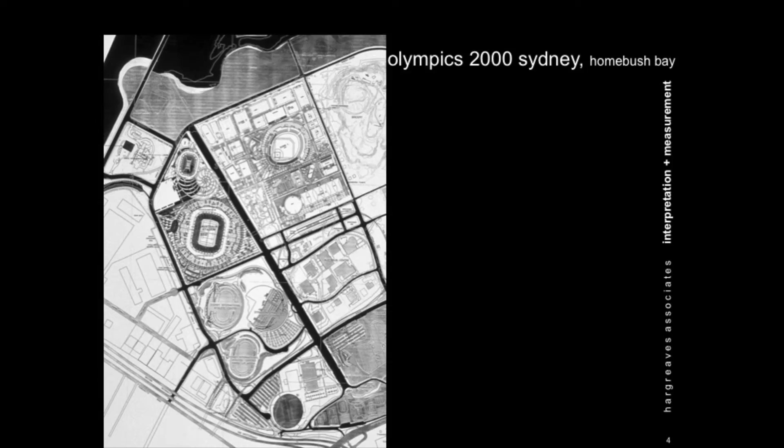We had it turned into 8 weeks—we had 8 weeks to turn this around, to meet with each of these developers and design teams, and create a public realm, and to make the public realm as important as each of these venues, perhaps more important than all of the venues.

So again, these are drawings done a long time ago, so a little bit fuzzy. We came up with this idea of red moves, green moves, and blue moves. The red moves were about paving on the site, green moves about landscape corridors, and blue moves about water. Water really became a central story to the plan.

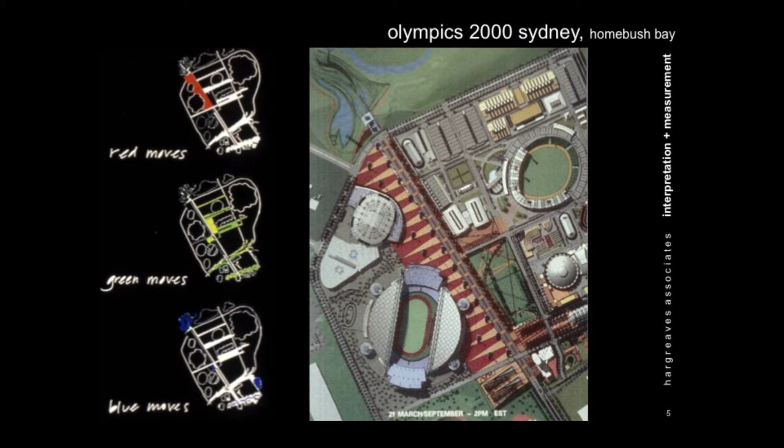And the creation of a rug, if you will, on which all these venues would sit—a common address for all these venues, a slope from top to bottom, continuous, 800 meters long, a fountain at the top and a wetland at the bottom. I'll come back to both of those. A train station here, and then the stadium, of course, and the other venues as addresses on this public realm.

So here we are in Sydney, but that's not where we were—we were out in Homebush Bay. So this was sort of what the master plan was doing. They had an idea of an Olympic Boulevard, but that's it.

So this is the way we started, with a very small model and basic ideas. The focus of this was not only gathering all the energy, the solar energy, which I'll come back to, but really using the stormwater on the site.

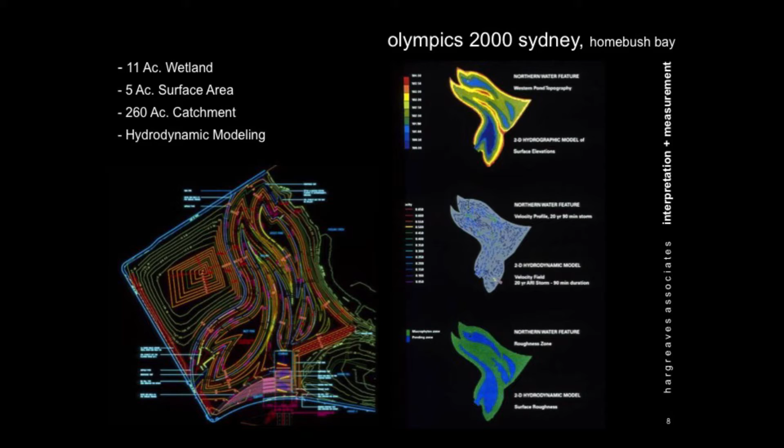The northern water feature is where all the stormwater on the site was collected, and it was cleaned through this system of wetlands. We had to do all of the hydrodynamic modeling to make sure the water would move through the wetland system at the pace it needed to, in order to be polished and cleansed before being reintroduced to the Parramatta River, back to the harbor, back to the bay. Wetlands are about slowness and fastness, slopes and gradients, and the right kinds of plants to do the filtration job you need them to do.

So here's a summary. We needed a resultant 70 to 90% reduction in average pollutant export from the public domain. We needed to reclaim an industrial site for people, with a high percentage of impermeable surface - we'll talk about that again in a minute. We wanted to integrate the stormwater pollution control into the site drainage system and make it part of the design. We had to reduce the demand for potable water.

Sydney is one of those climates like California with occasional droughts. We needed to improve the quality of water entering the natural water systems, so we came up with a wetland system as an integral part of the larger site system. Water would go into a fountain, be aerated, go to a storage area for irrigation, or go into the wetland system and be recycled and used on the site.

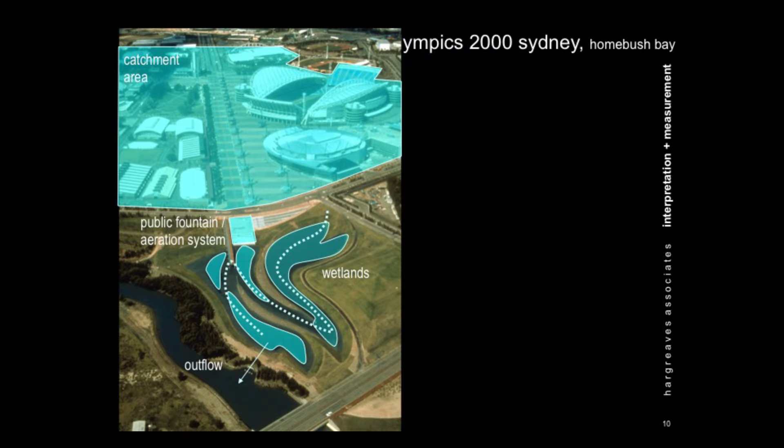Catching the water from the entire catchment area through the wetlands and tiered wetlands, it moved through each of the ponds at a prescribed rate, with an outflow back into Haslam's Creek, which went to the Parramatta River. This diagram shows how some of that water went through the wetland systems - each of these are tiers of the wetland system - while some went right from the catchment area to a cistern and helped with the use of water on the site.

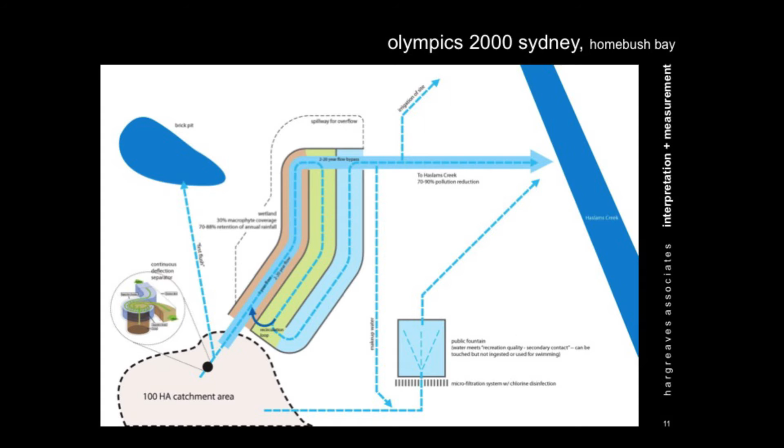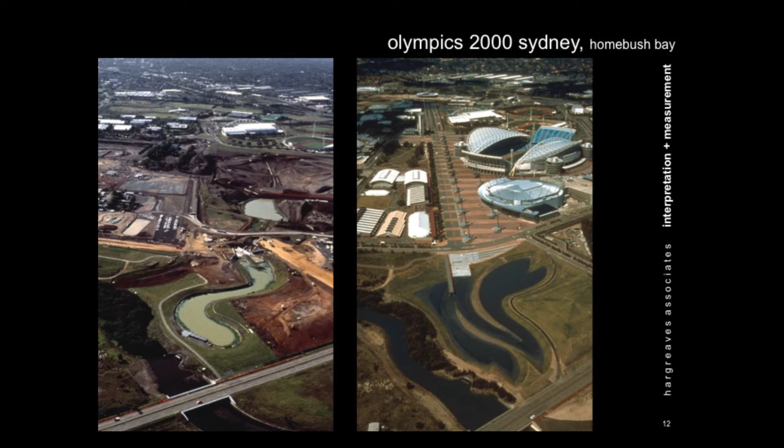So the water was used in every possible way. One thing I didn't mention was that this is the site before, this is the site after. There was an amazing amount of pollutants in the soil, a lot of PCP in the soil, so all that soil was piled here into this giant landform and capped - that's also how we dug, so it's a balance of cut and fill on the site.

So a large earthwork project, a large stormwater reuse system, and solar energy as well - those components comprised what made this the Green Games, as well as other things which I'll talk about in a minute, but those were the major foci.

So you see here in the background, that's the Aquatic Center, that's the natatorium, and you see it here during the games. They built that a couple of years in advance, and it was building that allowed them to get the games. When cities compete for games, they take various approaches to that - Sydney's approach was to build the natatorium in advance.

And it became an amazing and major amenity for the surrounding community, which was a lot of immigrant community, and it really helped them become part of a community. So this Olympic site is part of a community, and this area here - let me see if the next slide shows that. No.

This area is also where they have the Easter show each spring. The Easter show in Sydney is like a giant state fair on steroids, with everything from cows to baseball to plants and flowers, and everybody in Sydney goes. That gave the Olympic site life after the Olympics. The natatorium is used by the community, the Easter show happens every year, and they built residential here as well.

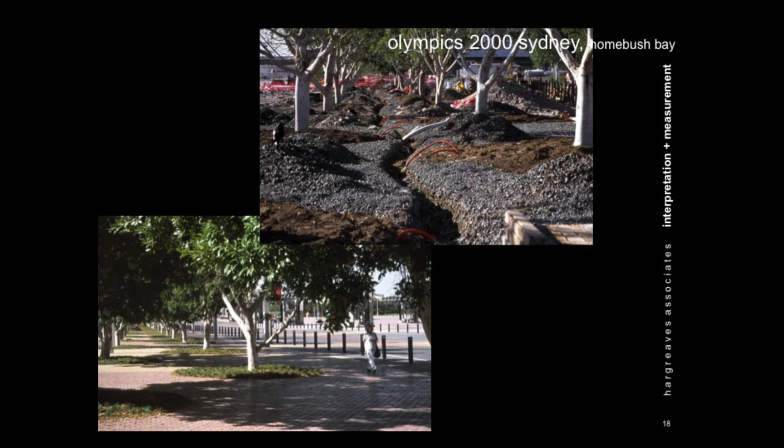These are the fig trees that came by barge down the river and were planted at this size. You can barely see it in this image, but you can see the gaps between these pavers, and that's how air and water would add to the water getting to the roots through an irrigation system.

And again, you can see those little gaps.

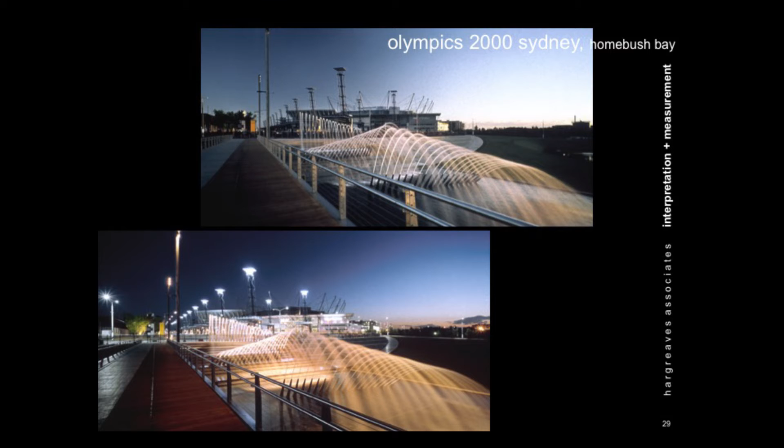Beautifully lit at night, and another one of the artist projects for the games worked on this pier with us. The pier is underlit, and it starts out as hot colors, and as you progress out over the wetland, it ends up in cool colors. This was the artist's way of speaking to the fact that the water is changing as it moves through this system.

Stainless steel tubes, and you can see how they're both twisting and torquing, which emphasizes the cascading effect. And of course, we hadn't quite anticipated people getting in the fountain, but of course they did. Notice that the water coming out is above eye level. That's really important, because people will stick their faces in a jet of water.

So it became quite the ceremony at the top of the mound, looking back over the games every evening.

Okay, so now we go to London. And it's amazing how that site looks sort of similar, doesn't it? This is East London, near Stratford. If you read The Little Match Girl, this is where those factories were, where The Little Match Girl took place.

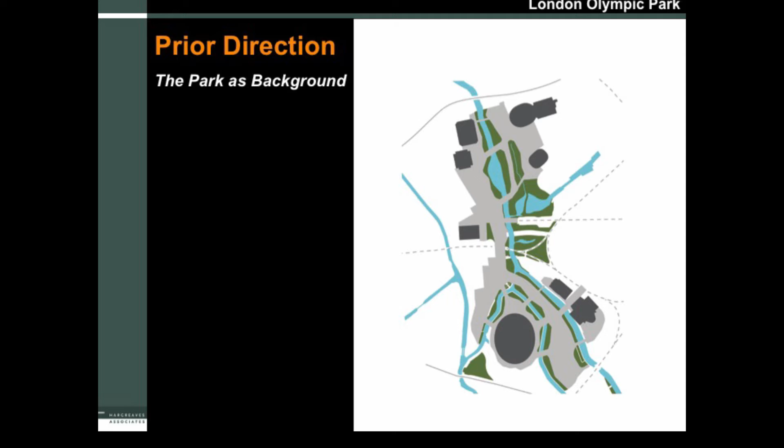And it seemed to us like there were redundant systems of paving, like promenades next to promenades next to promenades. The poor river was having a hard time making its presence felt. So the first thing we did was ask, where are people coming from? Why do we have this paving in these areas? We learned quickly that most of the people are coming from the train station here.

This is Zaha Hadid's Aquatic Center, and they're going to the stadium, which is here. Really, not that many people are coming into the northern half of the games site.

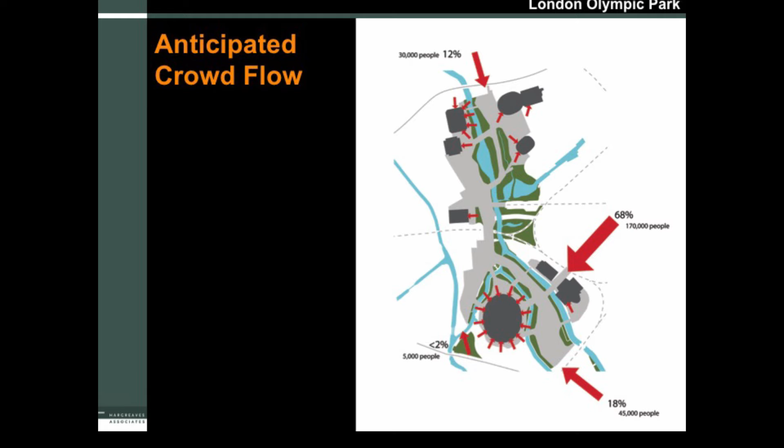And it really is a southern half and a northern half because it was bisected by infrastructure in the middle. So the first thing we said was, wait a minute, you're over-designing, you've got more paving than you need. And we ended up with a scheme more like this, which very simply conveys the fact that the park became the foreground, the park became the address for the games.

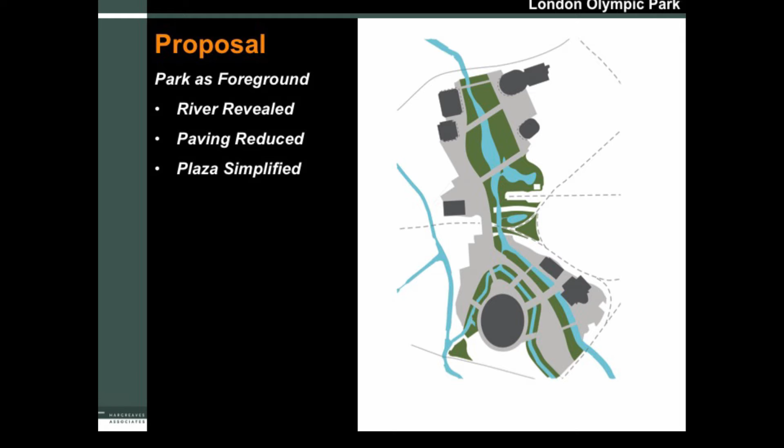This is 274 acres of parklands in the heart of this site and a restoration of a river, like this. So in the northern half, many of the banks of the River Lea were green-ish but very steep, and you can see how you couldn't see the river when you were at the top of those banks.

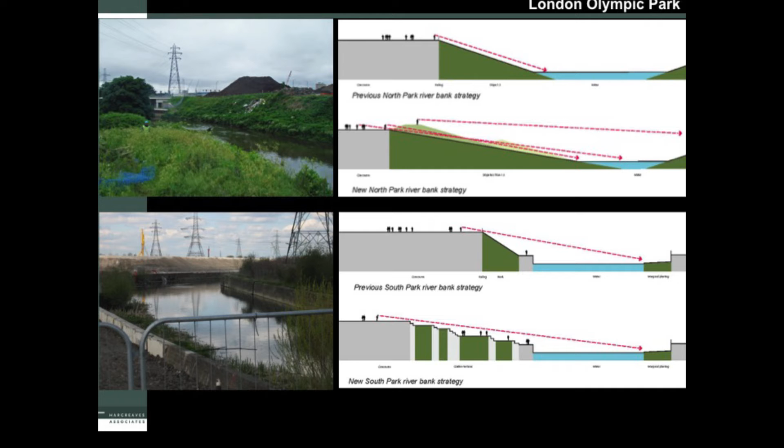So in the northern half of the park, the ecological half, we just laid the banks back and sculpted them so you would have access to and a view of the river. Then in the southern half, near the stadium, the river had actual concrete and steel walls. There, because the land was more constrained, the approach was to terrace those riverbanks in a more architectural way, but still with the same goal of getting views and access to the river.

So the design principles were to extend the games to legacy. We were also thinking about, after the games, making more of the river, and accentuating the differences between the North Park and the South Park.

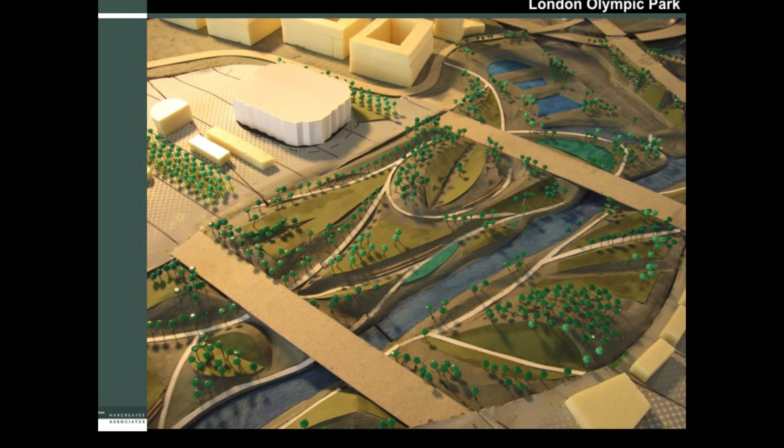So again, we started with a clay model in this office and worked very roughly and very quickly with clay. In this case, it was a pretty big model, and we just kept working with it, sculpting the riverbanks, laying them back so there would be riparian areas, marsh areas, upland areas, promontories, and promenades. We kept refining that same model and using it as a tool to bring all the designers and teams together.

So just to give you a few markers, here's the stadium, here's Zaha Hadid's Aquatic Center, here's the Velodrome, which I think is actually the best of all the buildings, and the train station here, which would then give access to the stadium here.

So we took it apart and thought about it as layered systems - the water systems for drainage, for bioswales, for wetlands, and for the river.

The circulation systems: the river walks, the footpaths, the concourse, and the bridges. And the bridges needed to be more than twice as wide for the games than they needed to be long term.

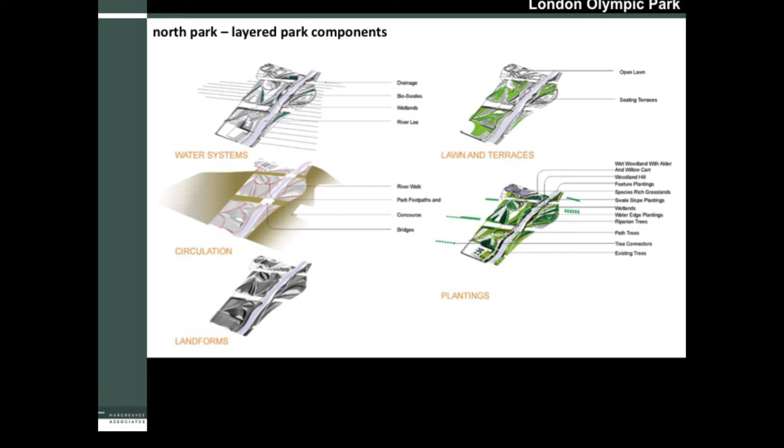So you'll see in a minute, the bridges were designed to also reduce in scale post-games. And landforms - the landforms were again about balancing cut and fill. We balanced cut and fill on the site, which saved a lot of money, which enabled us to do some of the things we wanted to do by saving that money. So engineers start to listen to you when you're able to talk about the systems that they're doing.

We had two engineers - one in the northern park and one in the southern park: Atkins and Arup. And in Great Britain, in London, they don't think of landscape architects as being able to do things like topography, grading, and drainage systems. So we had to prove ourselves and the science of what we were doing, and show understanding of how that relates to cost and construction phasing.

That's how we gained respect around the table, if you will. Then the lawns and the terraces, and then the plantings. And then thinking about it in games mode, and also in what they call transformation mode - because it's just a matter of weeks, like 6 weeks of the games and then the Paralympic Games. And then suddenly venues go away, like this venue goes away.

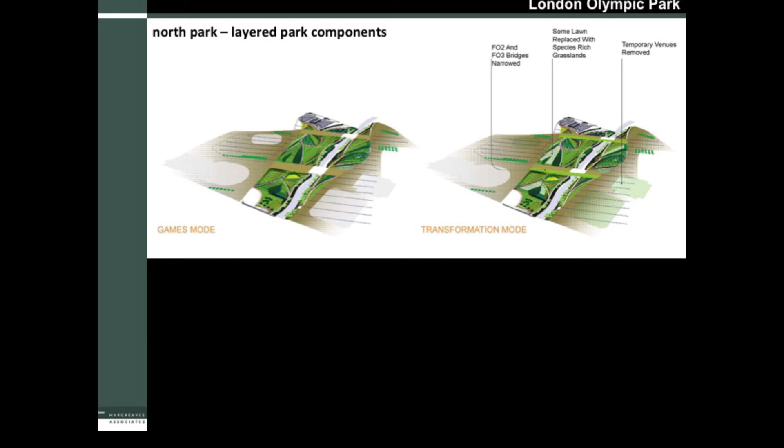And much of the grass turf areas that we put in during the games, for viewing by the hundreds of thousands of people who would be there, needed to turn into meadows, because they wanted us to leave behind 24 habitat types, ranging from stony meadow to riparian to woody to meadows. So there were many different kinds of habitats that we needed to leave behind, and post-games, a lot of that would be converted into habitat.

And you can see here the bridges - the very wide bridges during games, and then the reduction in scale of those bridges post-games.

So here's the northern park. You see it looks very much like that clay model. This is many weeks of work later, but still holding true to the clay model. And you see the amount of paving that was needed for the games.

But post-games, we really only needed a promenade of about this width. So all of this paving is made of asphalt that after the games was ground up and stirred into the soil to create stony meadow habitat. So it was a temporary paving system that became part of the restoration of the site for habitat.

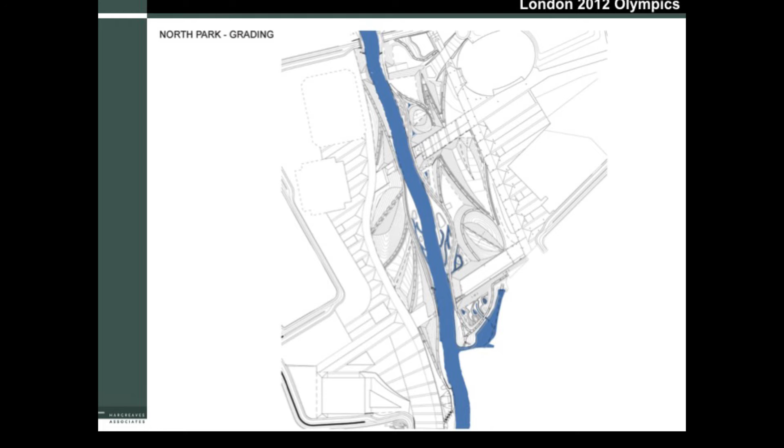So the real key was the grading and the way the water moved through the grading on the site. And then using that grading and that water to create the biozones, to create the different kinds of habitats, to create the different kinds of planting. So all of it an intertwined system.

You can see here some of the types of biozones, from wooded gullies to frog ponds and loggeries. We were working with habitat restoration specialists because we were creating habitat for frogs, for snakes, for birds, for swans, for many different kinds of critters on the site, and different kinds of wetlands and different kinds of woodlands to support different kinds of life.

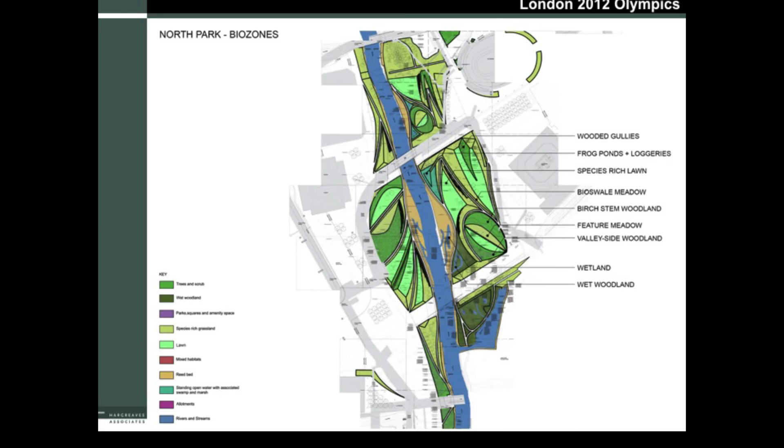And we were thinking at each turn about how these spaces would be used during the games, with all the people, with the big stadium, with the wide bridges, and then post-games, meadows, and more natural landscape introduced.

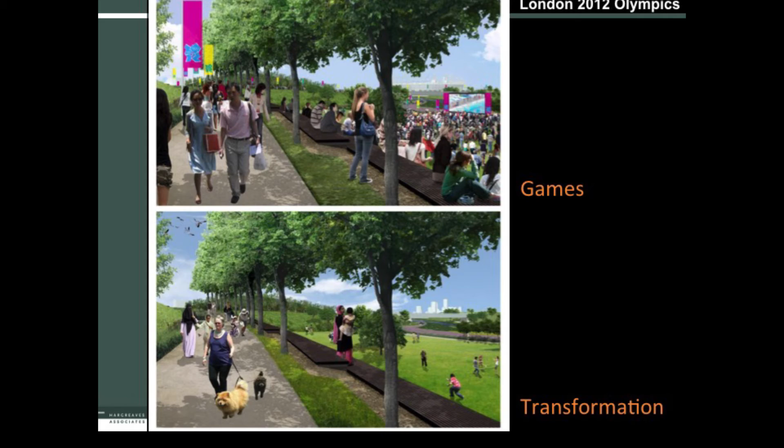During the games, they set up these giant projectors throughout the site, giant screens throughout the site, so you could watch the games and be in the landscape. And since it was Great Britain, you could buy a bottle of wine and sit by the river and watch the games on a giant screen. That part was really quite lovely.

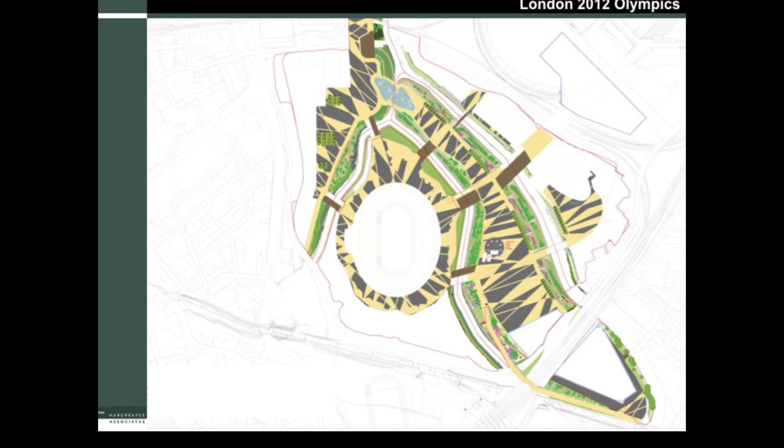So here we are in the southern park. And in the south park, you see, of course, the stadium and a lot more paving. This has now been turned into a festival park. But you see here the Olympic Gardens and the River Lea and its tributary, which went around the stadiums.

So, being the British, they didn't want a big flashy fountain. Think about Sydney and think about that amazing use of water and the statement of how we were using water as a feature, as an iconic feature on the site. The British wanted Olympic Gardens.

So these are the Olympic Gardens here on those terrace banks of the river. So we came up with an idea to theme those gardens based on all the countries who come to the games. And really this was a nod to the British legacy of plant collections, of going all over the world and collecting plants and bringing them back to the UK.

And it was unbelievable what a success this was, how many people loved the gardens and came and took pictures and studied the gardens and wanted to know the species. And we worked with a doctor of horticulture and botany from one of the universities there to teach the contractors how to plant these gardens, how to plant these seeds.

You know, they weren't local plants, they weren't native plants. We wanted the wild look, and nobody knew how to do that. So it took people on site working with the contractors to teach them how to do this.

But it was great fun to see people come to their garden from their country and check it out during the games. And then there was the structure of these gardens, so they weren't just like throw all the seeds in and throw all the plants in and walk away.

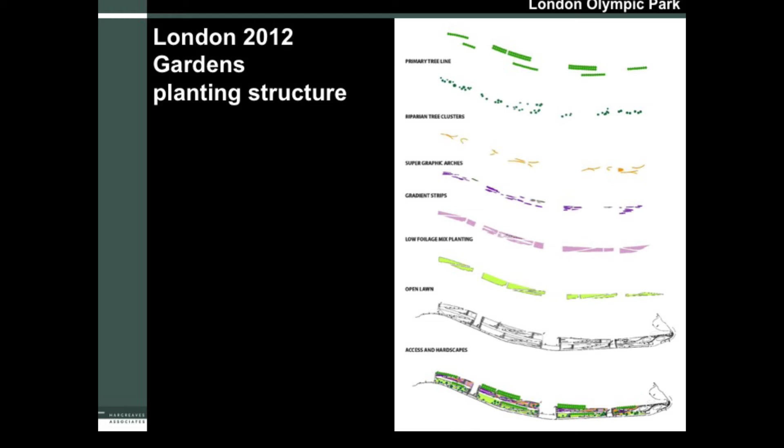We used trees to create form and structure. We had some riparian clusters of trees. We had these arches of hedges that created sort of super graphics. We had slopes that we had to deal with differently. We had lawn areas, and then we had hardscapes for access. So it was a whole series of systems that gave actual structure to the planting. And again, water informing the various habitats on the site.

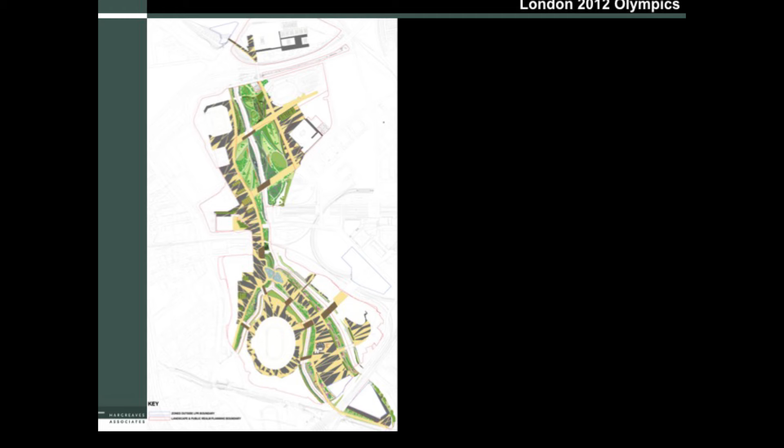So that's the whole plan for the games. So now I'll take you through construction.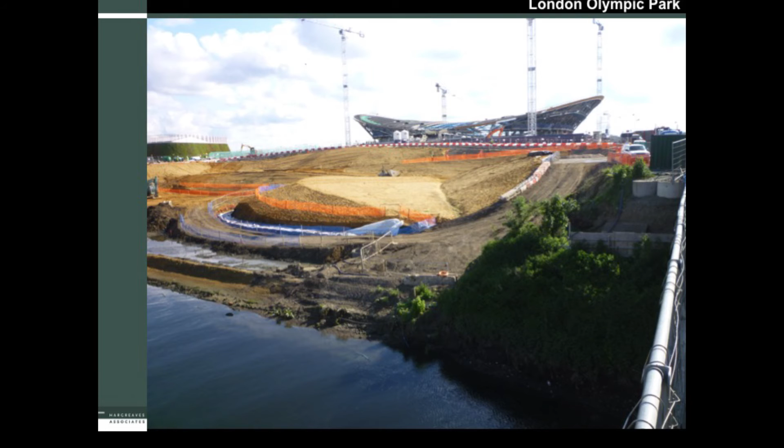You see some of the earthworks, and you can see the inspiration for this particular area. That's the Aquatic Center. We were really paying attention to the sculptural forms of the venues and the landscape.

Again, construction in water. It was interesting because during construction, they thought they would be very crafty and used river water to irrigate these trees while doing construction. The river water was so polluted it killed the trees, so they had to stop that.

But you can see how we were using landforms to create places of gathering. And during construction, it was amazing how fast habitat emerged, and how fast wildlife responded. You can see it coming along.

So terraces, we folded terraces into these hillsides for viewing and gathering, and they were very big on accessibility for all, not just for people with mobility challenges, but accessibility for people with mental challenges, sight challenges of course, but also emotional challenges. So we had to learn about places that make people afraid or uncomfortable, and design this very, in the end simple, but during design complex, pedestrian pathway system.

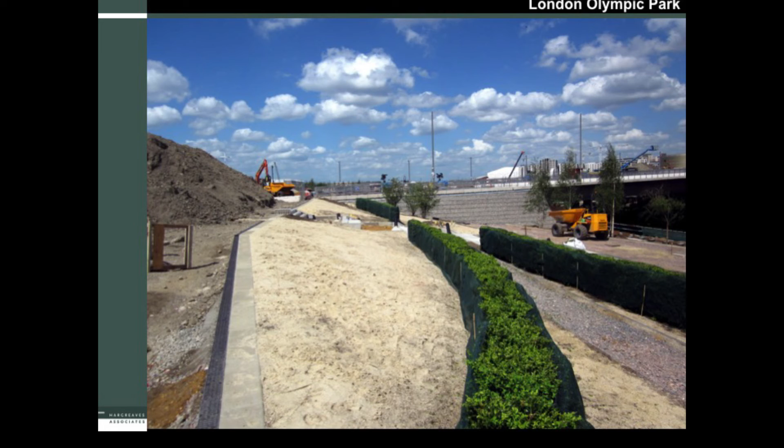And that was the North Park, so here's the South Park during construction. You see right away, this is the support for one of the bridges, but you see right away these super graphic hedges that formed part of the structure of the gardens going in early. And then the addition of these custom benches, which are now catalog benches.

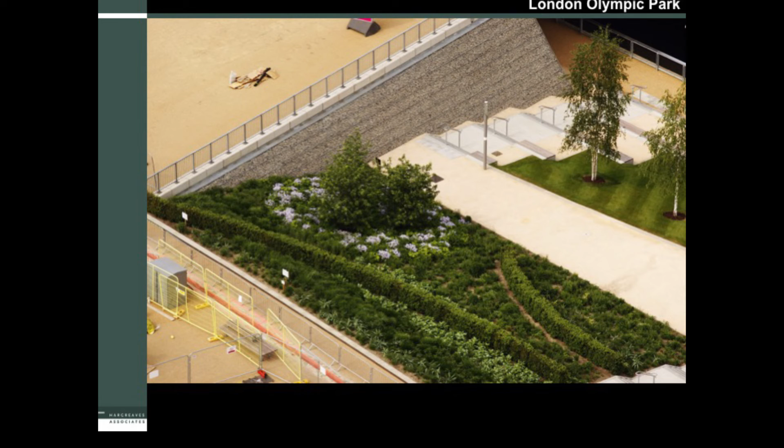And again, the sort of graphics of the gardens as well as juxtaposed with the wildness of the gardens. And you can't quite see it, but there are gaps - these are rock, gabion rock abutments to the bridges. And there are holes in them, and those holes are for specific critters. So everything was habitat.

And during construction, the gardens started to emerge in a kind of wildness. And these were the wind energy - in this case, being in Great Britain, it wasn't about solar energy, it was about wind energy. So these are the light standards for the London Games that were about harvesting wind and making wind energy.

So in Australia, where it's all about getting out of the sun and having so much sun, in Great Britain it was about wind and capturing every bit of sun you could. So again, you can see this sort of seam here between permanent paving and temporary paving.

So you see the sort of super graphic hedges moving through the random plantings.

The mayor of London called the Parklands the winner of the games.

So a lot of the design was about negotiating grade change, ramps and steps, accessibility, and pedestrian flow. It was one of our biggest challenges. This was the North American Garden.

Okay, so post-games: the challenges of transformation, how to connect the park to its surroundings, making a park that would be world-class. By the way, this is the largest park built in the UK in 150 years. So we were really building upon Victorian traditions of gardens and parks, but in a way that speaks to our time and our issues.

Program, identity, and connections. I mean really it became all about how to make this connected to neighborhoods emerging around this site, and being a catalyst for economic and social change, and vitality and robustness in terms of social change.

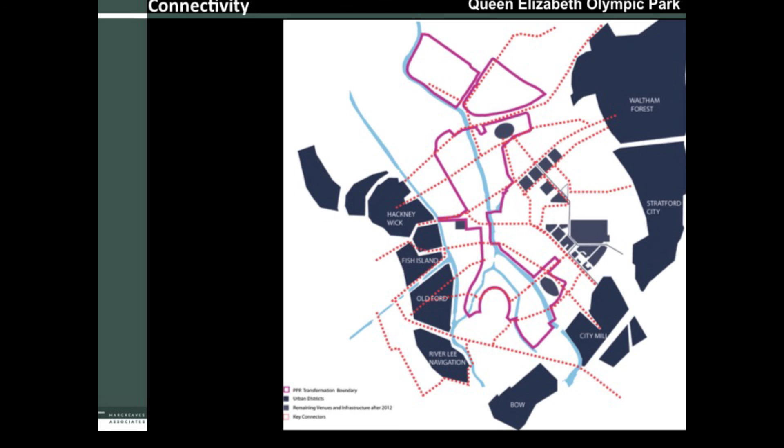And tricky, because the site they chose was an odd site, with a lot of barriers inherent by the river and the train station. This was really one of the biggest challenges and one of the big surprises that we pulled off.

When you think about ecology and program and community, and the fact that they all needed to be perfect and come together — like those gardens all had to be in bloom during those six weeks in 2012 — but then after 2012 you wanted them to all become a natural system. Each of those systems would more naturally evolve and branch out and become something over time, a more natural kind of situation. The games are very artificial, even though they were the greenest games to date.

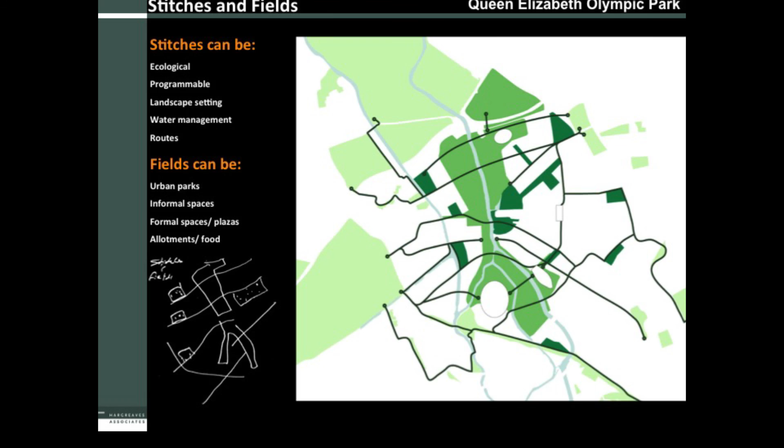So we were also looking at not only pedestrian and vehicular and mobility kinds of connections, but also green connections — what we called stitches and fields, destinations and corridors, habitat, of course flood, of course — all those issues being a part of a landscape. So we really tried to think of flood management, habitat creation, circulation systems, all integral and all a part of the landscape, all a part of the public realm.

And maximizing development potential, because you need the economic change to happen here. You need private developers to want to be at this address, so basically we're creating an address for private development. And then of course the green corridors and the ecological impact.

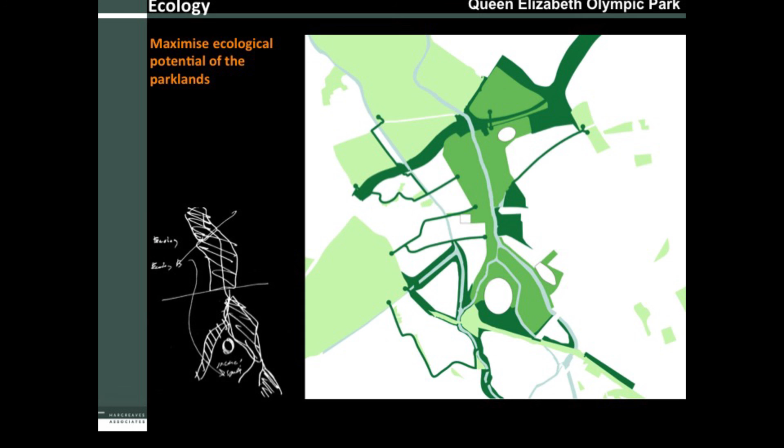So there are subtleties here between the games mode plan and the transformation plan, but I hope you can pick up on some of them. Right off the bat, you notice whole areas of paving and venues that turn into green, and whole areas of paving that get much smaller. And then some of the habitat and different kinds of landscapes that take the place of the removed venues and paving.